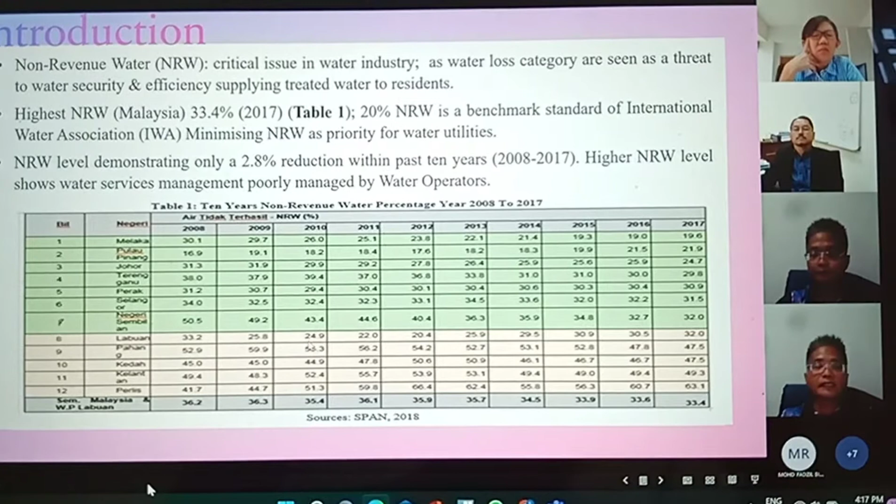Non-revenue water is a critical issue in the water industry, as water loss categories are seen as a threat to water security and efficiency in supplying treated water to residents. The highest non-revenue water in Malaysia was 33.4% based on data in 2017.

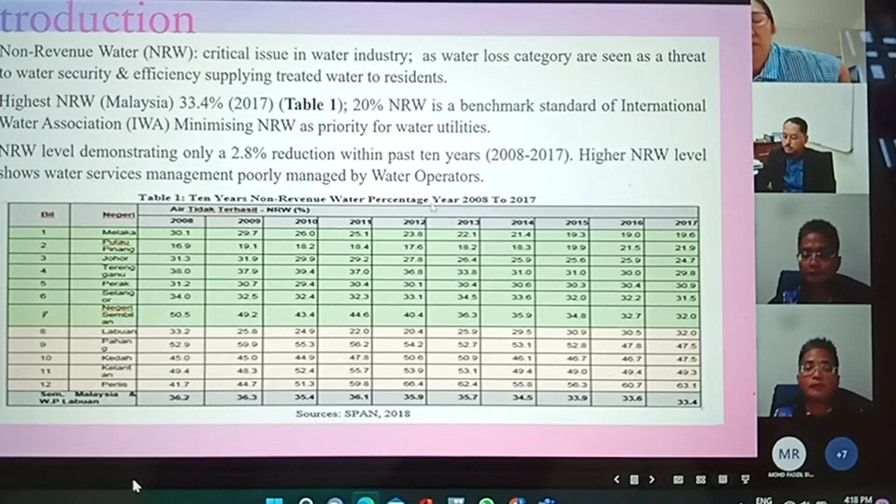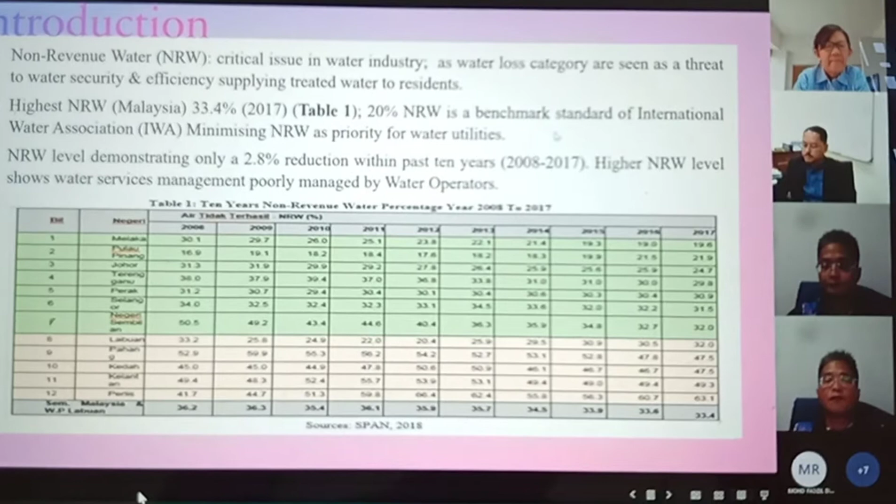In Table 1, about the 10 years non-revenue water percentage from 2008 to 2017 - by the way, only 20% non-revenue water is the benchmark standard of International Water Association. To minimize non-revenue water is a priority for water utilities.

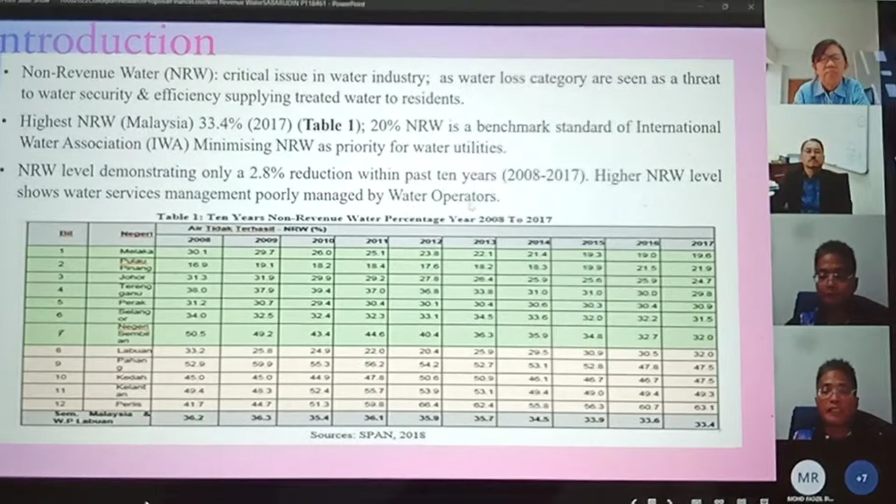The non-revenue water level demonstrated only a 2.8% reduction within the past 10 years, with the higher NRW level showing water service management poorly managed by water operators. This source is from the National Water Services Commission in Malaysia.

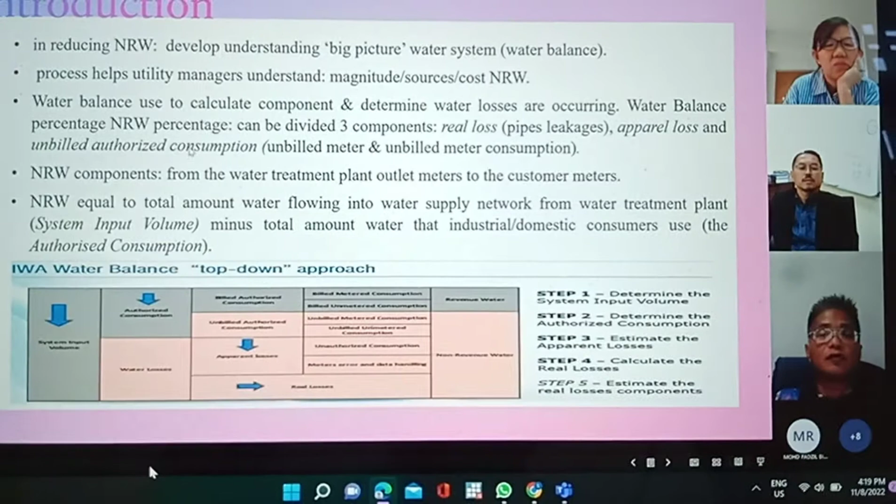In reducing NRW, developing understanding of the big picture water system is about the water balance. This process helps utility managers understand the magnitude, the sources, and the cost of NRW. Water balance is used to calculate components and determine water losses occurring, as well as the water balance percentage.

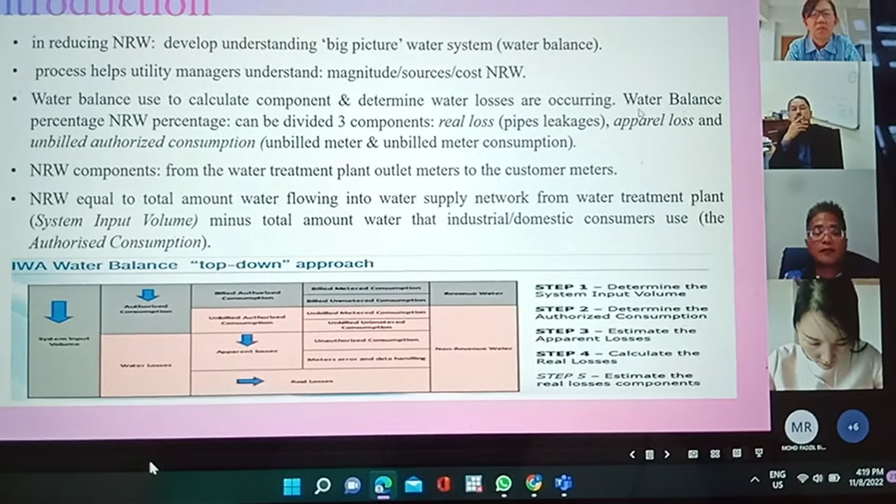Water balance percentage can be divided into 3 components: real losses because of pipe leakage, apparent losses from unauthorized consumption, and unbilled authorized consumption.

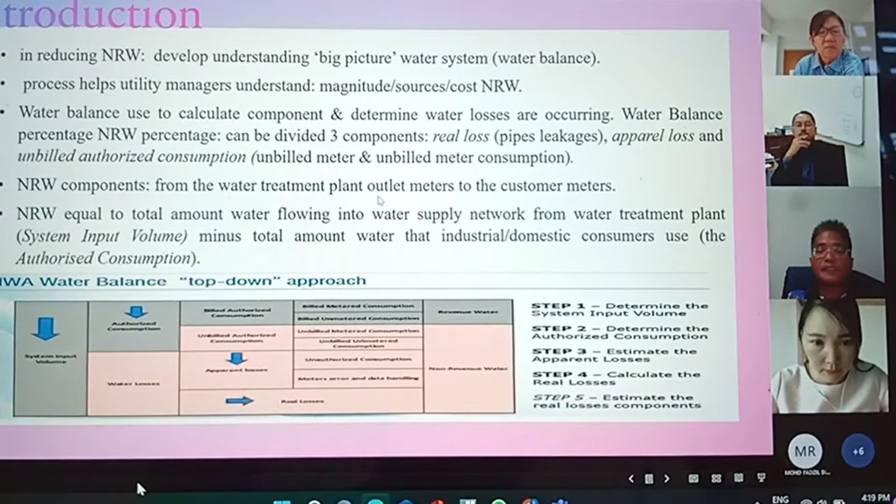NRW components come from the water treatment plants to customer meters. NRW equals the total amount of water flowing into the water supply network from water treatment plants. System input minus the total amount of water that industrial and domestic consumers use as authorized consumption. This is the approach known as the water balance top-down method.

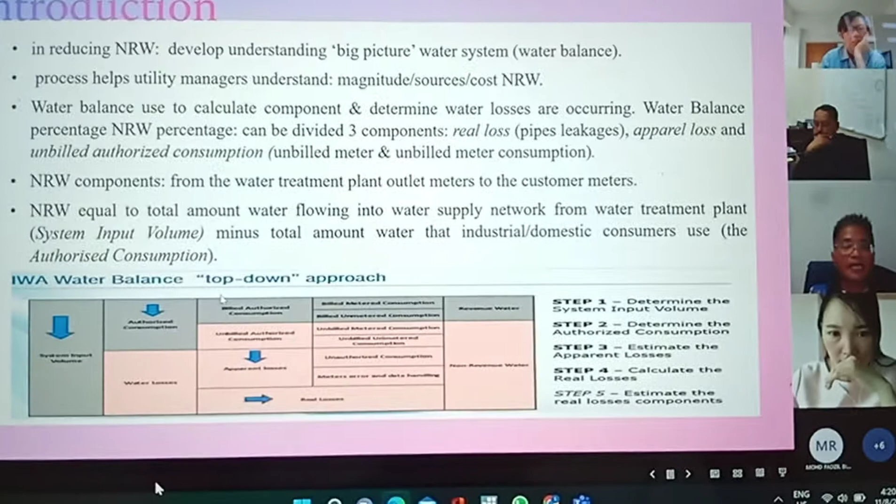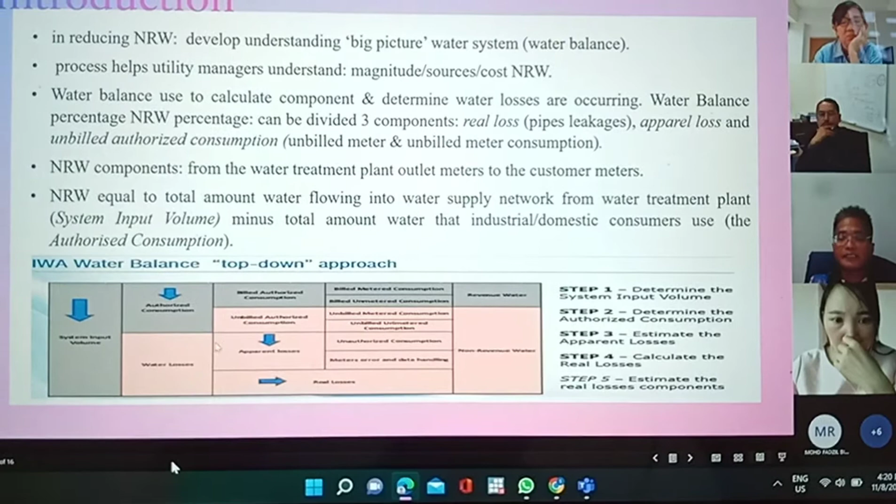Step 1 is to determine the system input first, then estimate the authorized consumption, then estimate the apparent losses and real losses. My area of study is about the real losses.

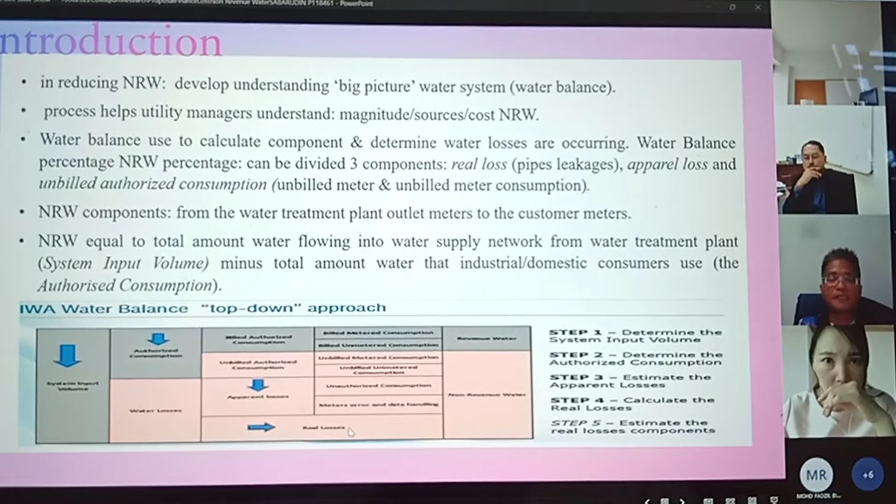I focus on non-revenue water because of the percentage of losses from real losses of water.

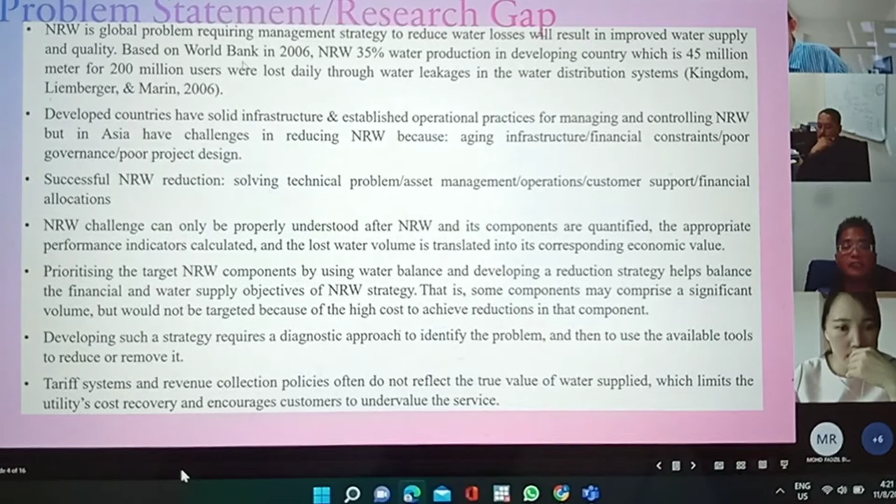My statement is that NRW is a global problem requiring management strategy to reduce water losses, which will result in improved water supply and quality. According to the World Bank in 2006, 35% of water NRW production in developing countries, which is 45 million cubic meters for 200 million users, were lost daily through water leakage in the water distribution system, as mentioned by Kingdom, Liemberger and Marin. Developed countries have solid infrastructure and service operational practices for managing and controlling NRW, but in Asia they are challenged in reducing NRW because of aging infrastructure.

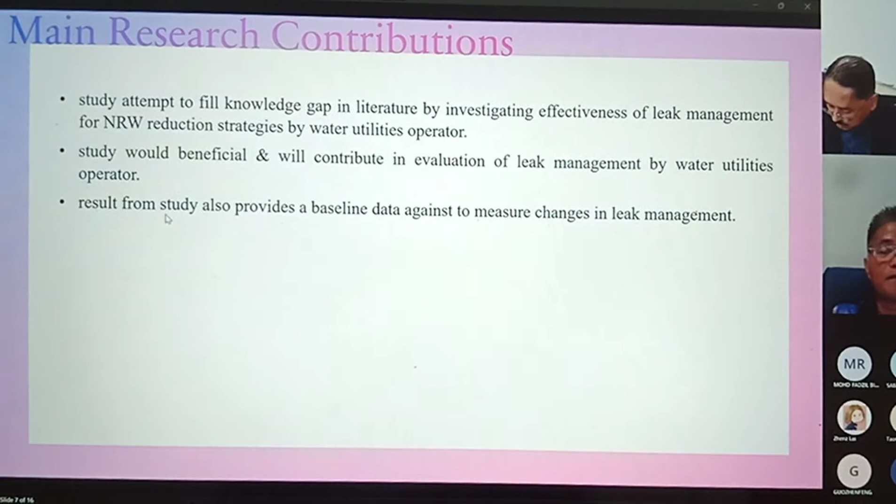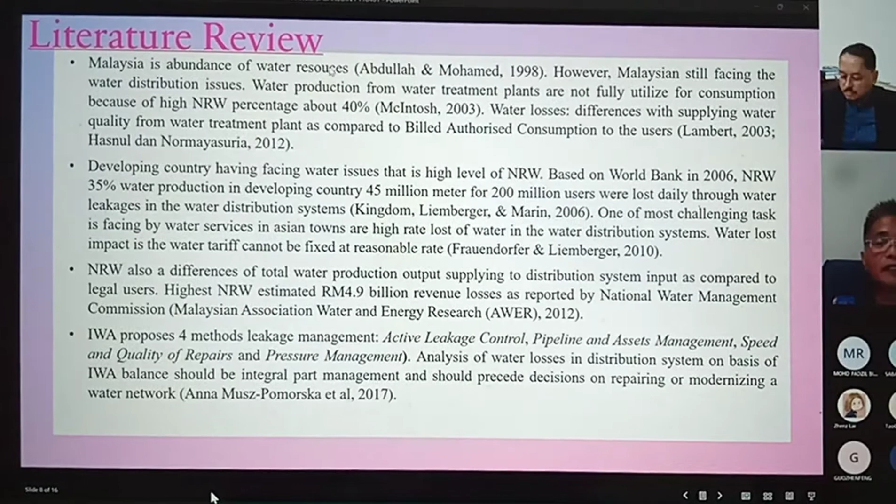In this literature review, Malaysia is abundant in water resources, as cited by Abdullah and Mohamed. However, Malaysia is still facing water distribution issues. Water production from water treatment plants is not fully utilized for consumption because of the high NRW percentage, about 40%.

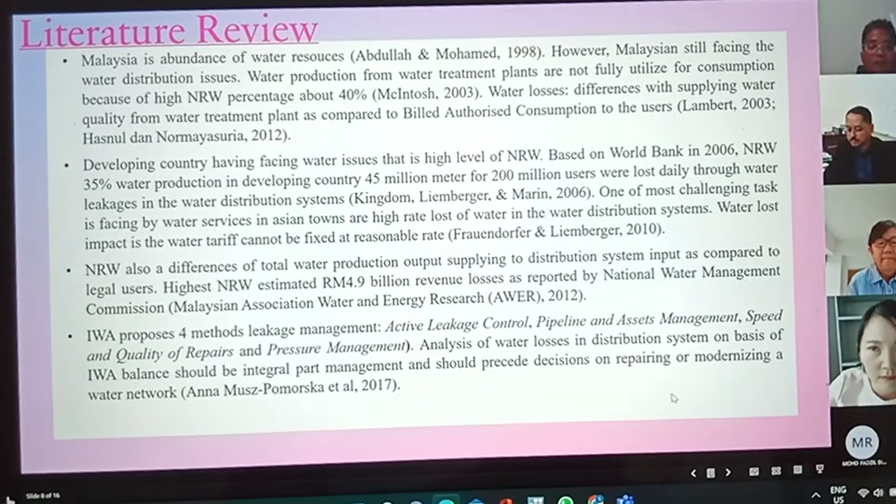Water loss is the difference between the supplied water quality from the water treatment plant as compared to the billed authorized consumption by users. Developing countries are also facing water issues of high NRW levels. Based on the World Bank in 2006, 35% NRW water production in developing countries, 45 million cubic meters for 200 million users, were lost due to water leakage in the water distribution system, as reported by Kingdom, Liemberger and Marin.

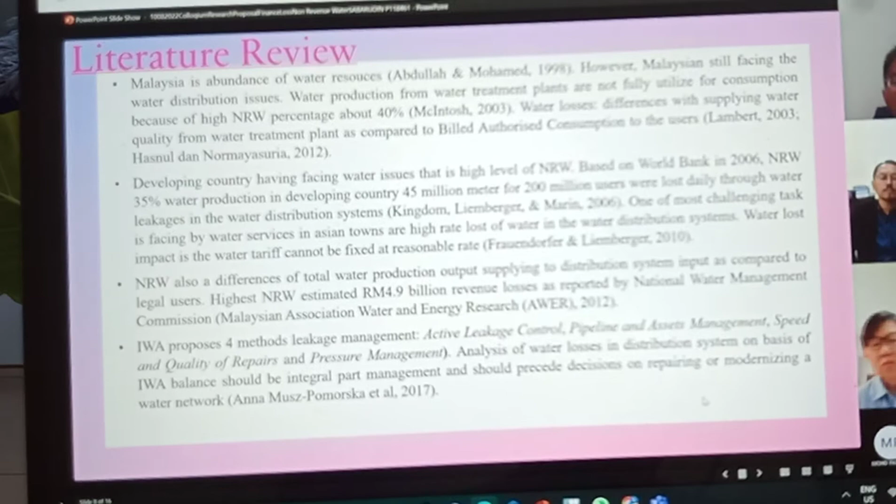One of the most challenging tasks facing water services is accounting for a high rate of water loss in the distribution system. Water loss impact is the water tariff that cannot be fixed at a reasonable rate. NRW also represents the difference between total water production output supplied to the system input as compared to legal users.

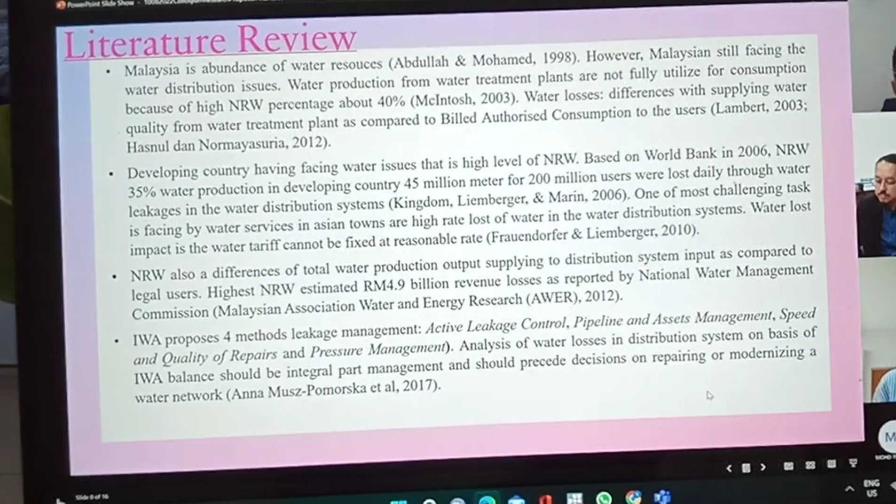The highest NRW resulted in 4.9 billion ringgit of revenue losses, as reported by the National Water Management Commission, cited by the Malaysian Association of Water and Energy Research in 2012.

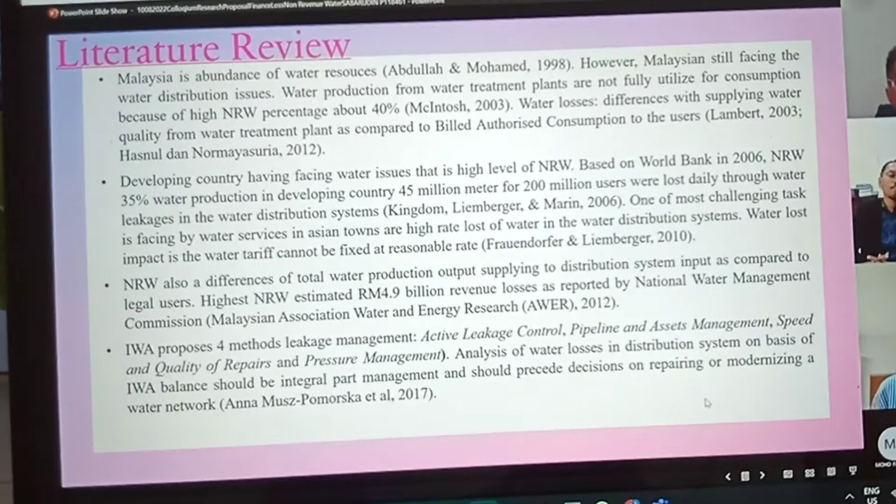IWA proposes four methods of leakage management: active leakage control, pipeline and asset management, speed and quality of repairs, and pressure management.

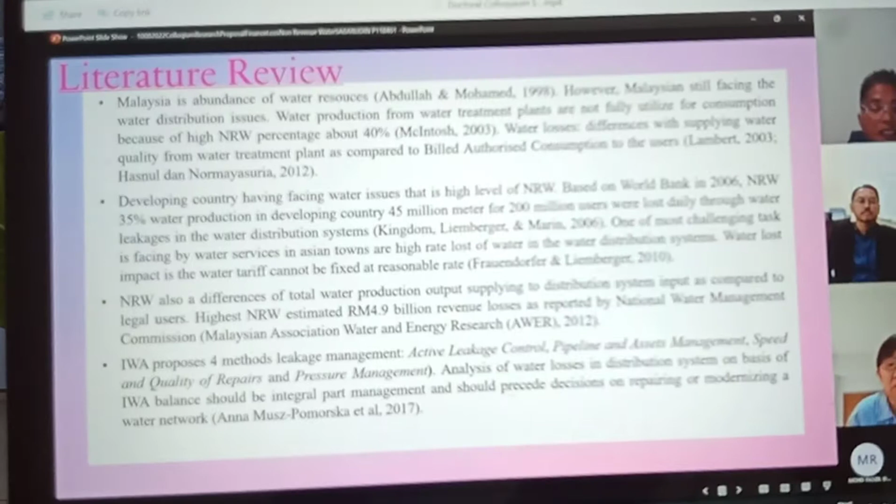Analysis of water losses in the distribution system on the basis of the IWA balance should be an integral part of management and should precede decisions on repairing or modernizing the water network. This is my summary of the review on reducing non-revenue water.

My hypothesis development: Hypothesis 1, water losses do not influence non-revenue water in the water distribution network. Hypothesis 2, prevention, leakage and control water pressure projects do not mediate the effect for reducing NRW in the water distribution network. Hypothesis 3, leak detection sensors do not moderate the effect for reducing NRW in the water distribution network.

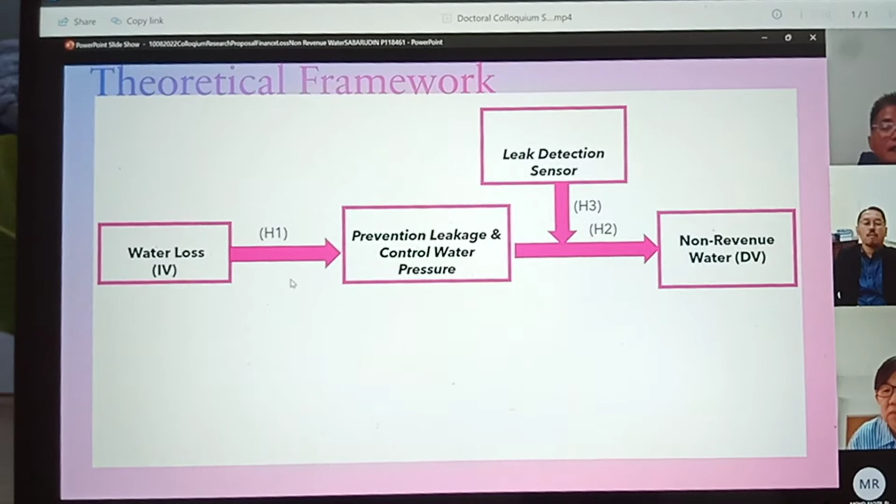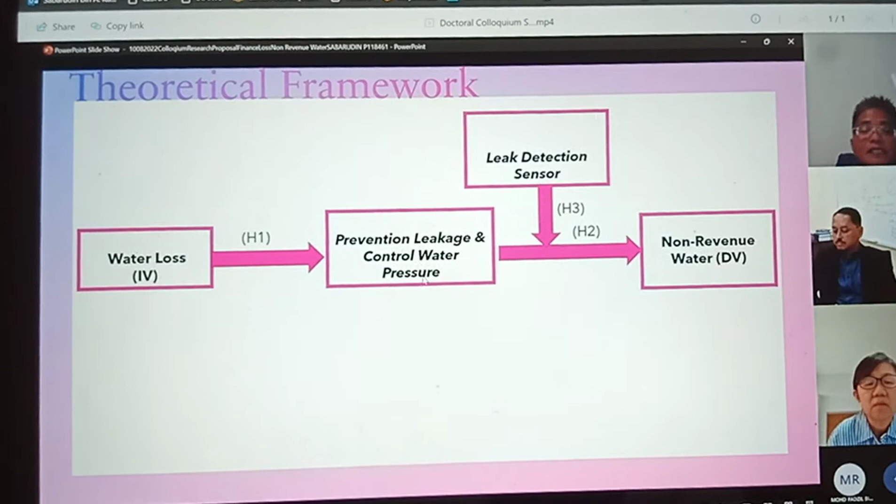My proposed theoretical framework: water losses is the independent variable, prevention, leakage and control water pressure is the mediating variable, non-revenue water is the dependent variable, and leakage sensors is the moderating variable.

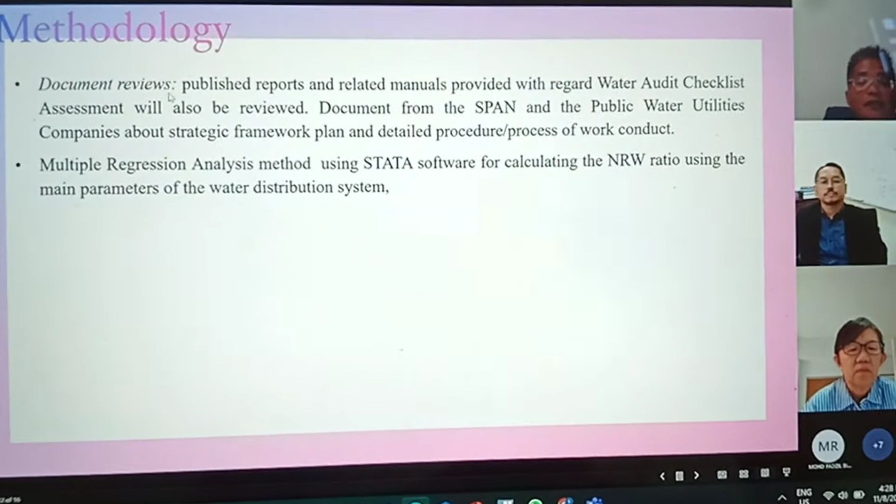My methodology is document reviews, which includes published reports and related manuals provided with regard Water Audit Checklist Assessment. This will also review documents from SPAN and the Public Water Utilities Companies about strategy framework, plan, and detailed process of work conducted, using multiple regression analysis method.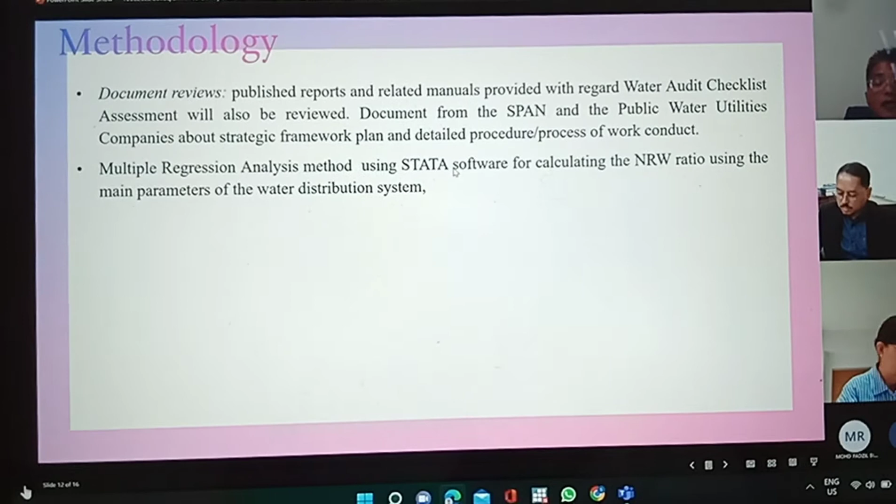Using software procedures for calculating the NRW ratio based on the main parameters of the water system, using secondary data.

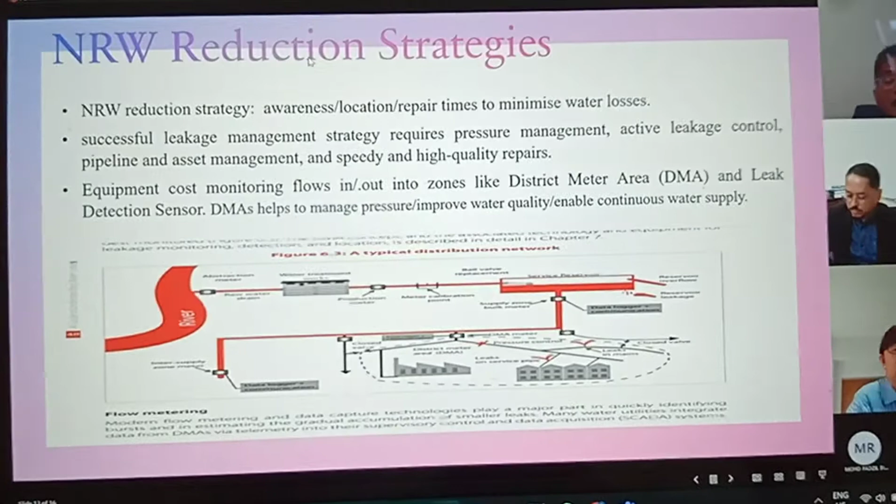The national NRW reducing strategy involves creating awareness of leak location and repair time to minimize water losses. The successful leakage management strategy requires pressure management, active leakage control, pipeline and asset management, and speedy and high quality repairs.

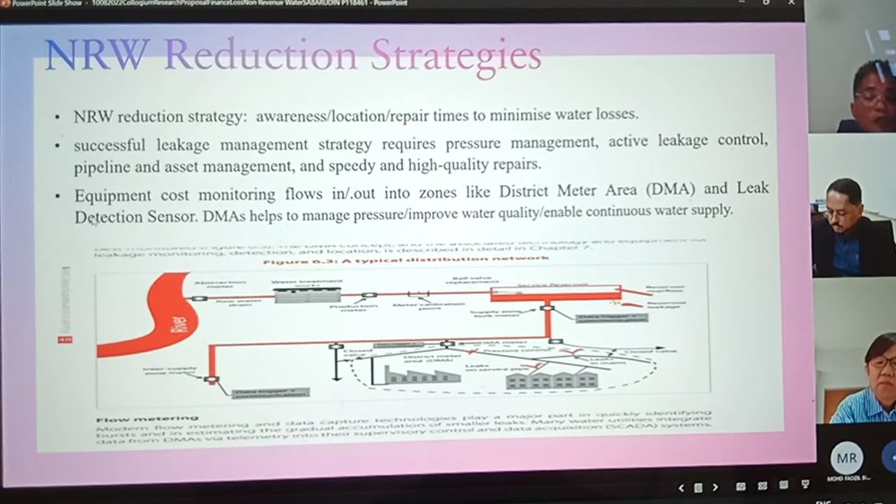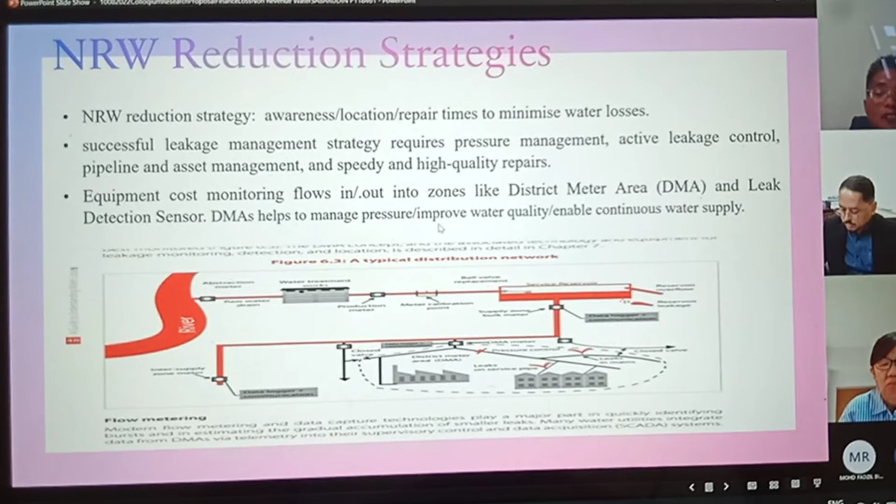Equipment cost monitoring of flows in and out of zones, like a district meter area, and leak detection sensors. DMA also has to manage pressure, improve water quality, and enable continuous water supply. This is the model of DMA.

My limitation is the availability of data, relying on water pressure and SPAN annual reports. This is all, I think, for my presentation. For now, I'll hand back to Professor and Doctor.

Thank you very much, Sabarudin. Dr. Farouk, would you like to start your comment? Okay, thanks Prof. Sabarudin. Assalamualaikum. Okay, yeah, but there are a few questions from me that need your clarification.

When I read the title of your research, Leak Management of Public Utilities for Non-Revenue Water Reduction Strategy, I'm not clear about the leak management. What do you mean by leak management and how does it relate to the non-revenue water reduction strategy? Actually, yes Doctor, I'm sorry, because I just changed my topic to public water operators' water losses, but focusing on strategies for reducing non-revenue water, focused on Malaysia.

Okay, so this is a new title, it's not like what is in my hand at the moment. Okay. At the end of the day, this new title is also a problem. Yes, Doctor, this new title is also very broad. My topic now.

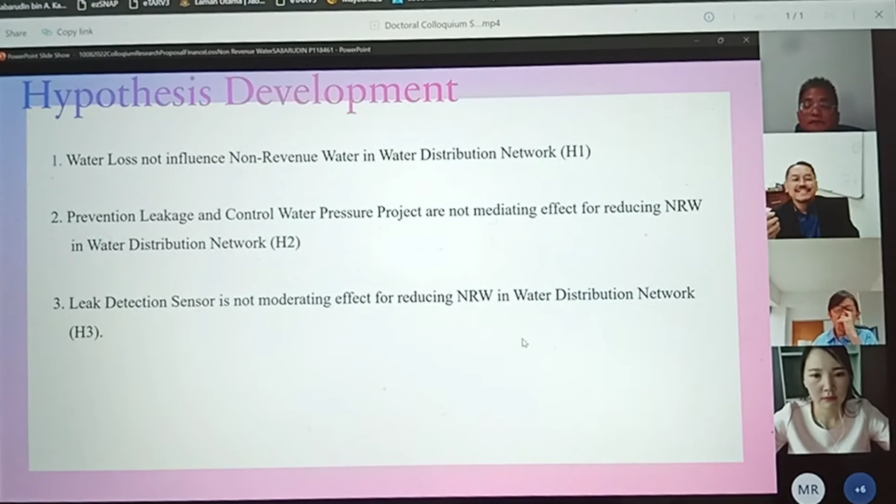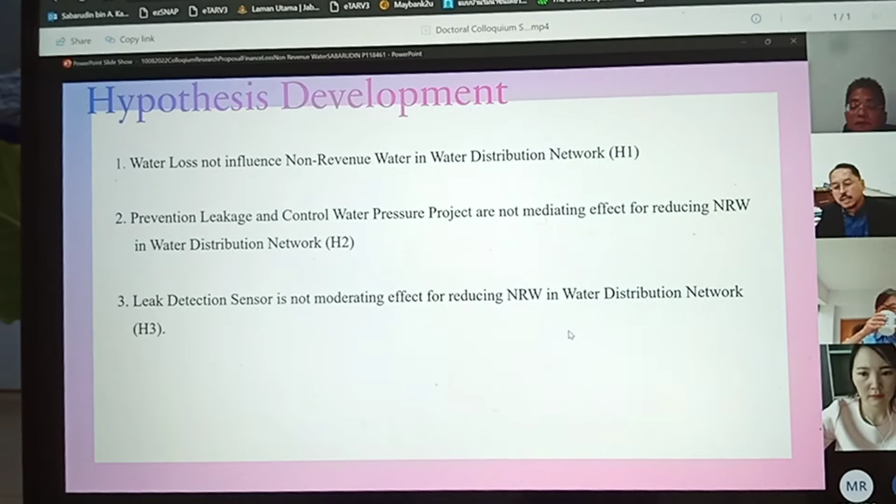This hypothesis, for me, seems like you're trying to prove something, like you're trying to prove the current strategy is not effective and not efficient. That is my impression. Or, at the end of the day, you expect to find some strategies to overcome the problem of this non-revenue water. Which one? It's not clear to me, Sabarudin.

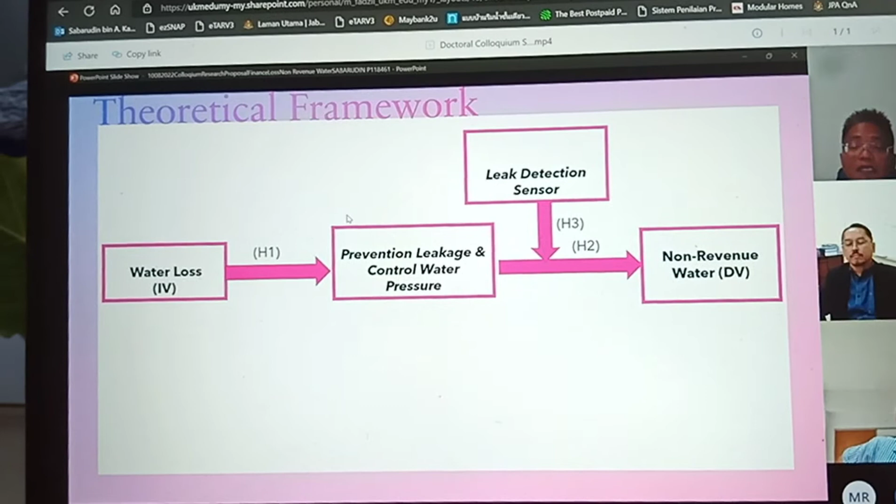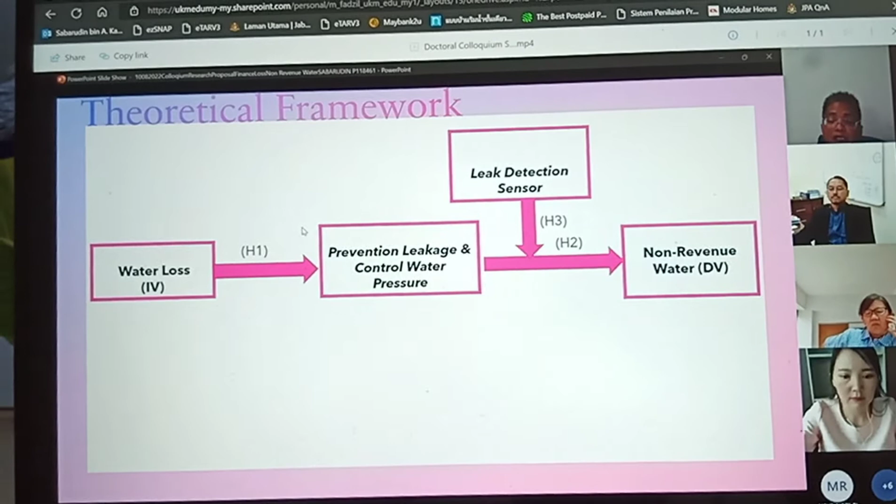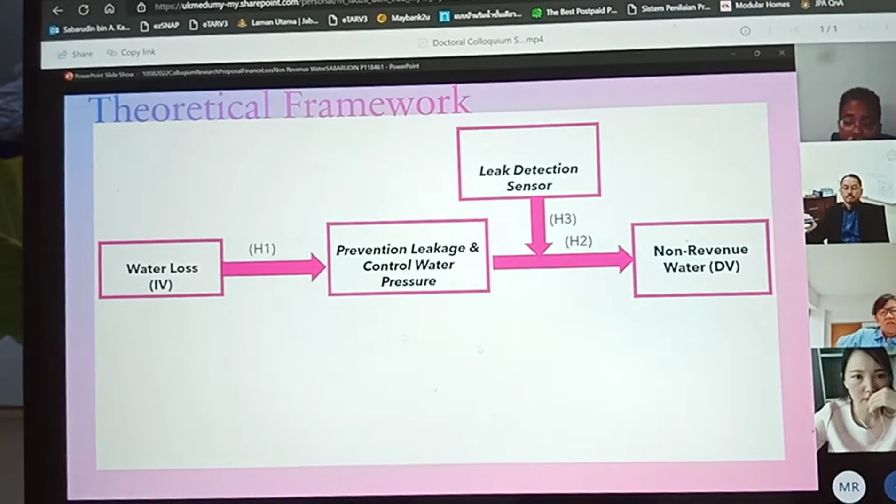Okay Doctor, based on my theoretical framework, I want to make clear whether water losses as an IV have a correlation with the non-revenue water. I just focus on the multiple regression analysis having a correlation effect. So, I think this is the first time there are studies about multiple regression analysis done this way, and I think I'm the first to study this in Malaysia using this procedure.

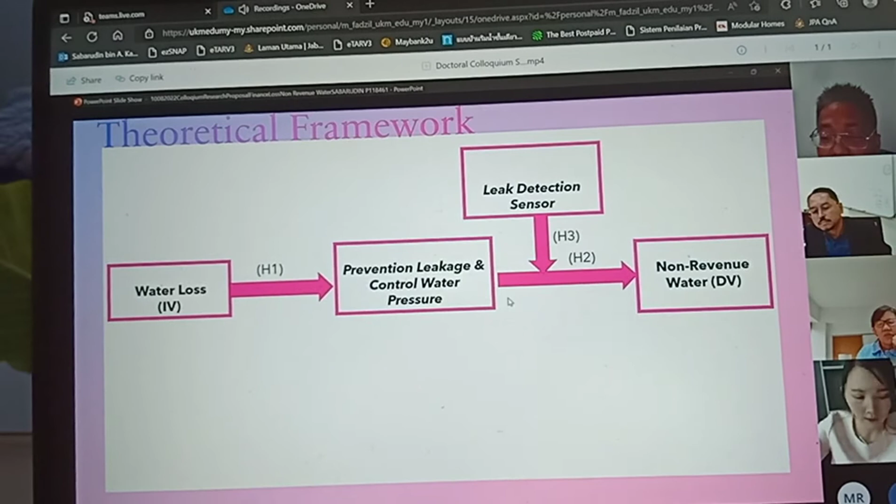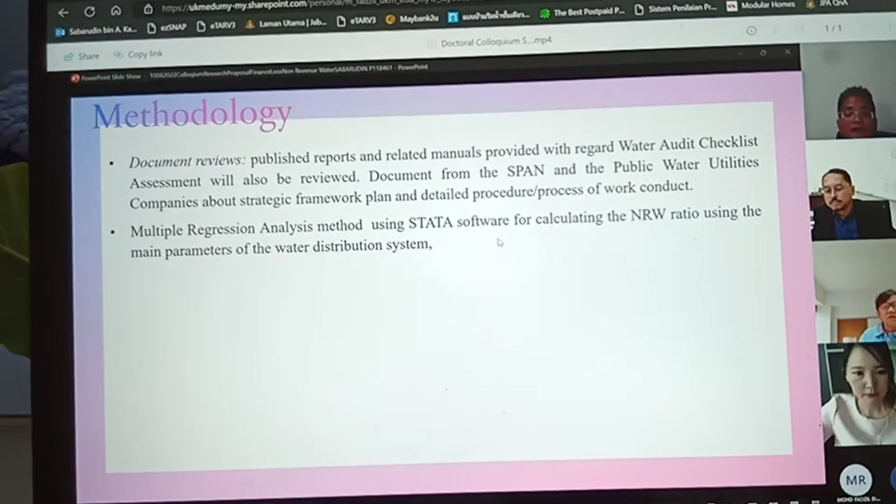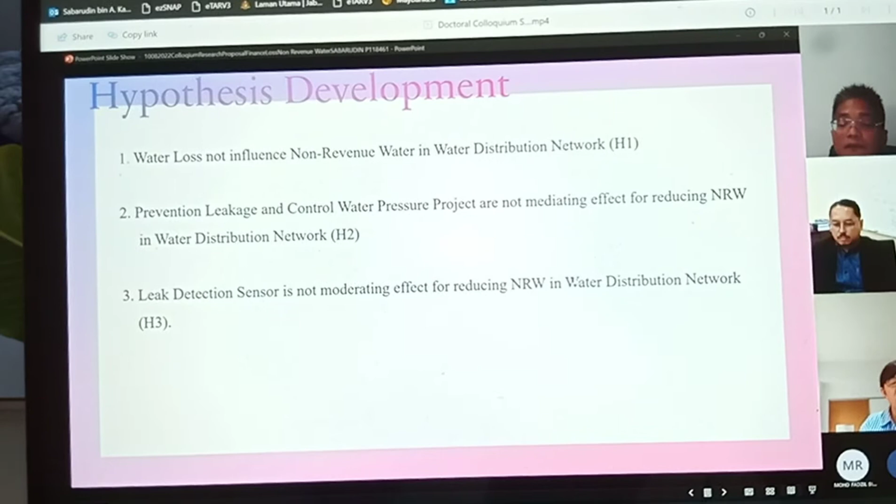I agree with what Dr. Fairuz just pointed out. If you go back to your diagram, Sabarudin, it is still not clear. The hypotheses are very poorly stated, and if you look at the way you state your hypothesis, and also look at this theoretical framework, I don't think this is a theoretical framework. The way you state your hypothesis, I don't see any scholarly voice here. Put it this way, your research is lacking scholarly voice.

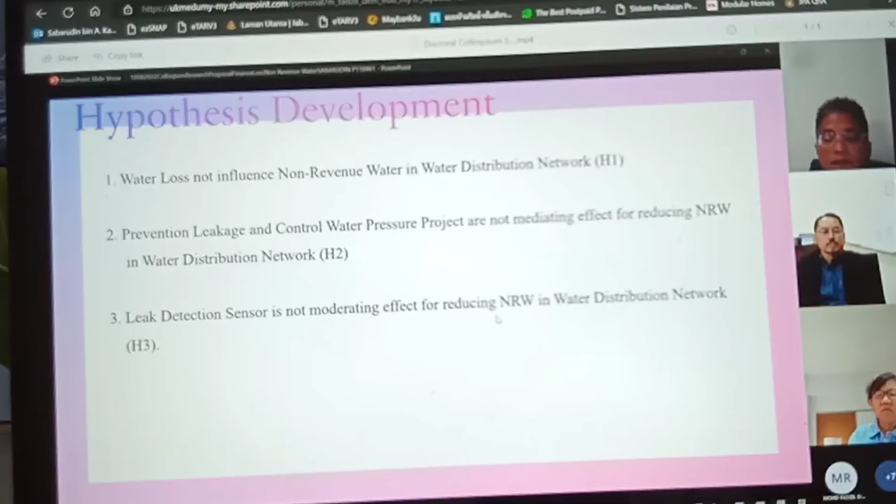So we understand you are a DBA student in your first semester, it might take longer for you to actually understand what academic work is. But based on your existing research, I don't see much scholarly element in it.

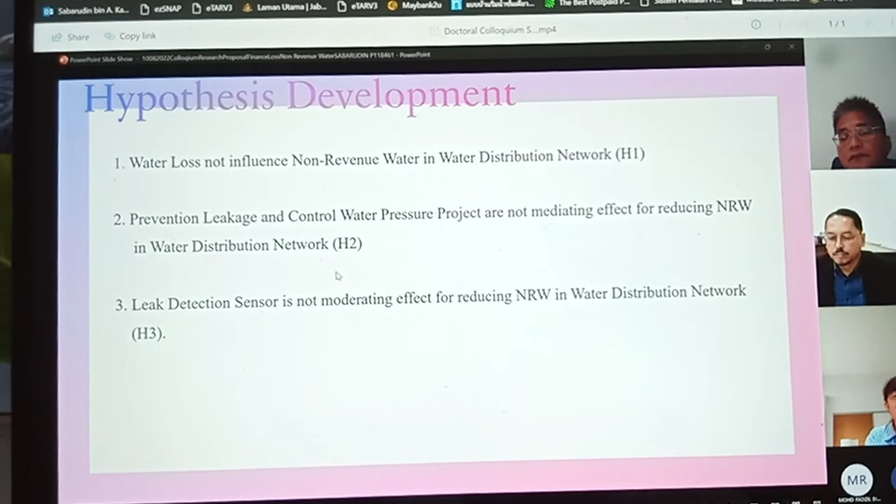Maybe this is what you plan, what you have interest in, what you want to do. But it looks as though this is more of an applied research with some application of literature, because applied research also requires a literature review. But the way you state your hypothesis, the way you formulate that framework, it looks to me more like applied research rather than academic research.

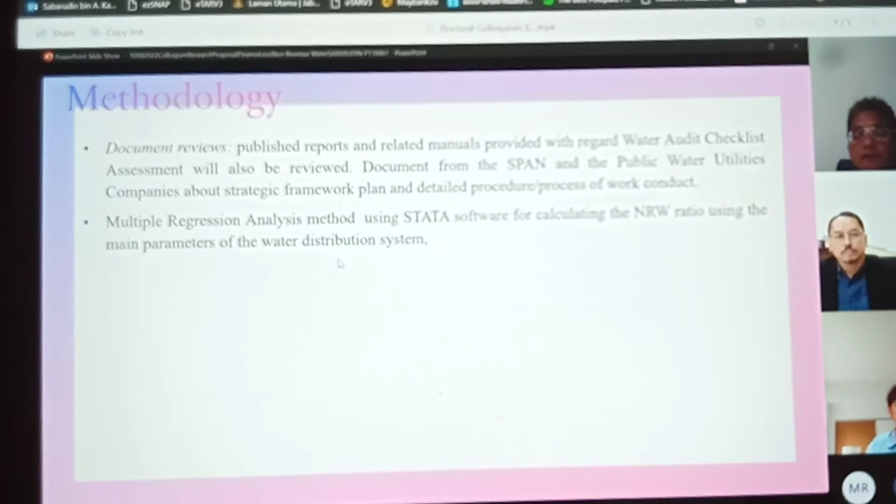Can you go to the next slide? And also the methodology that you want to use. Next slide, Sabarudin. Document reviews. This is not acceptable. Your document review comes from published reports and related manuals provided by this water audit checklist assessment. All of these are not acceptable references for academic research.

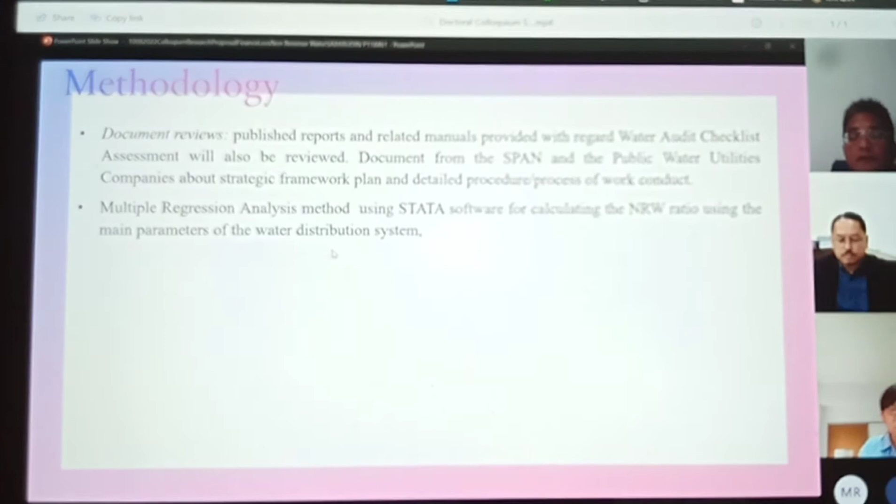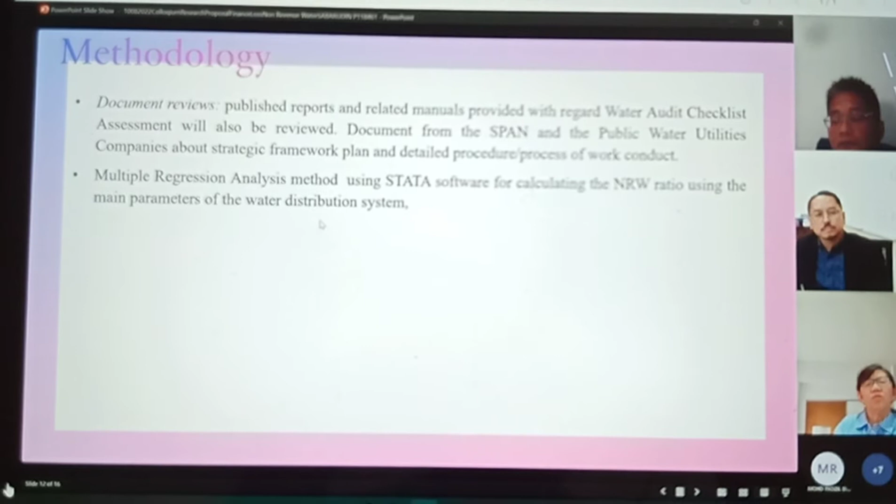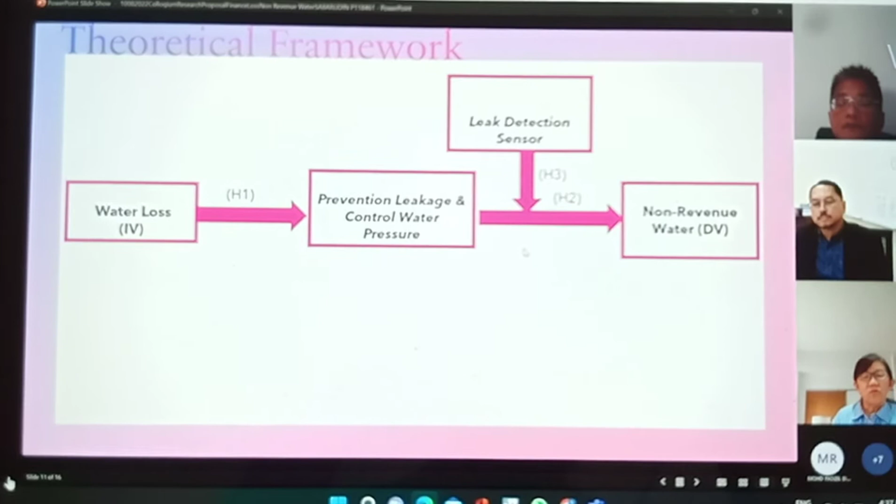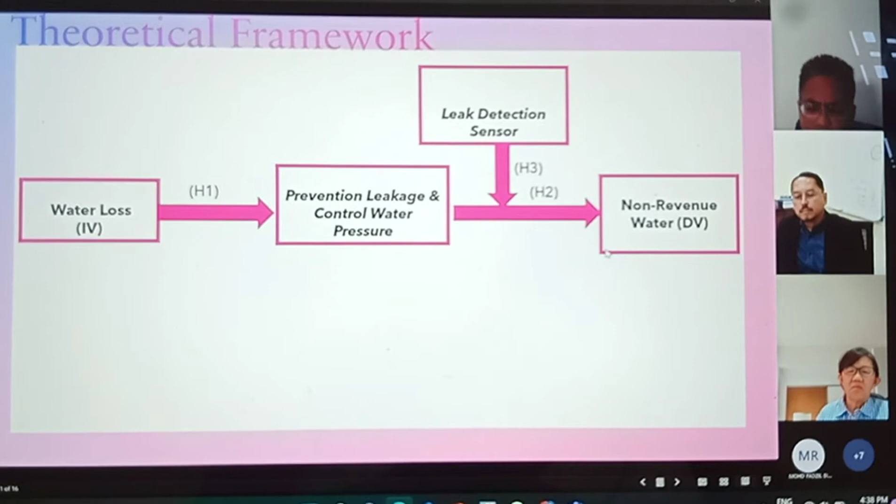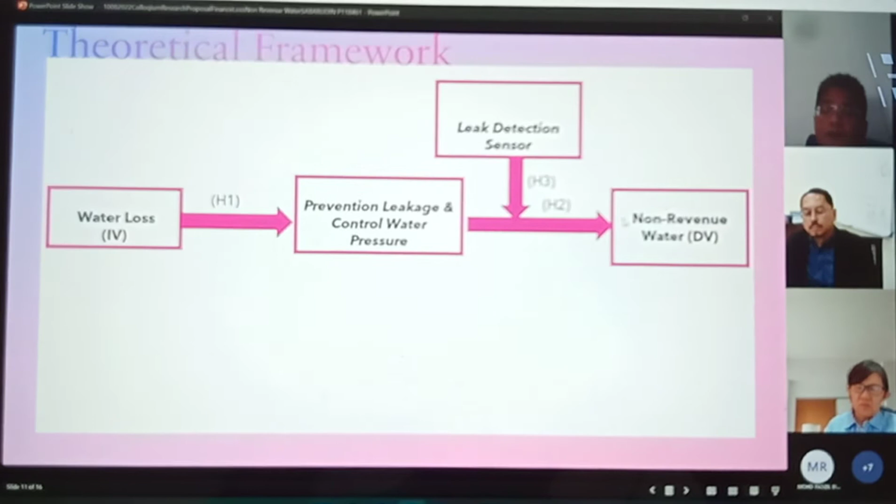Because I want to clarify about the collection by the public utilities. The water leaking means that money also cannot be collected by the public utilities, so NRW is very important. So 50% of the water loss is because of non-collection and because of water losses also.

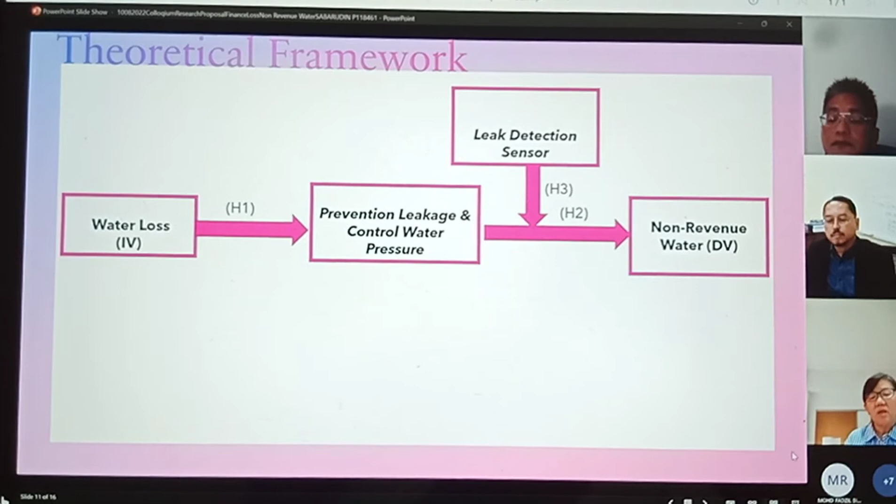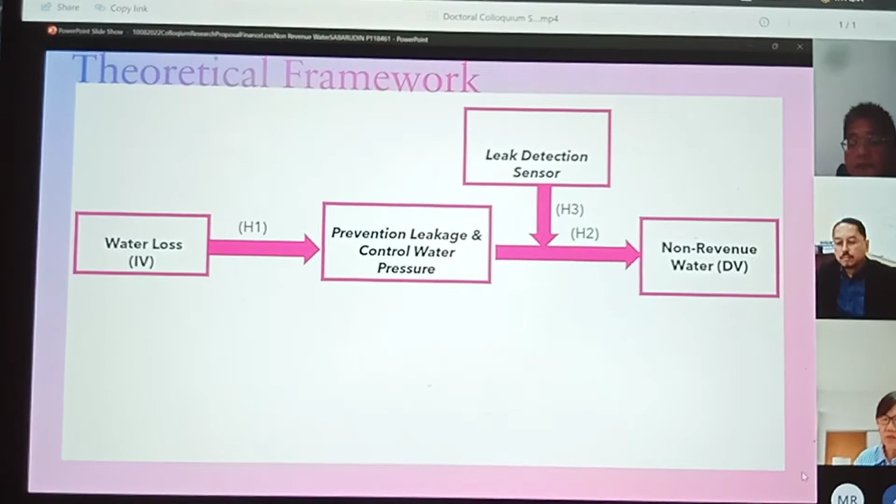This is okay to be used because for academic research, academic research needs to be backed up by academic work. Meaning to say, whatever you want to investigate, there must be an academic backing for the work you plan to do. But in addition to the academic backing, if you can bring in some practical evidence, for example this one, I see this as practical evidence to highlight the importance of your study. This one you have, Sabarudin — you have the anecdotal evidence to support the importance of your study.

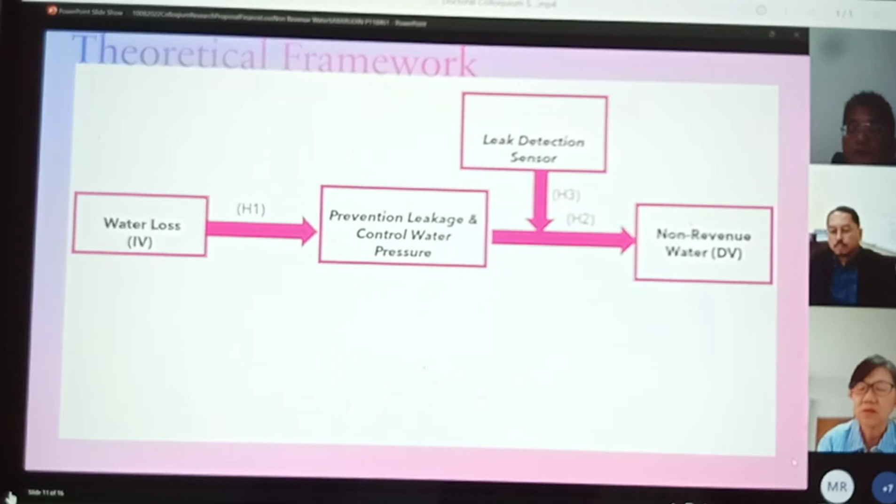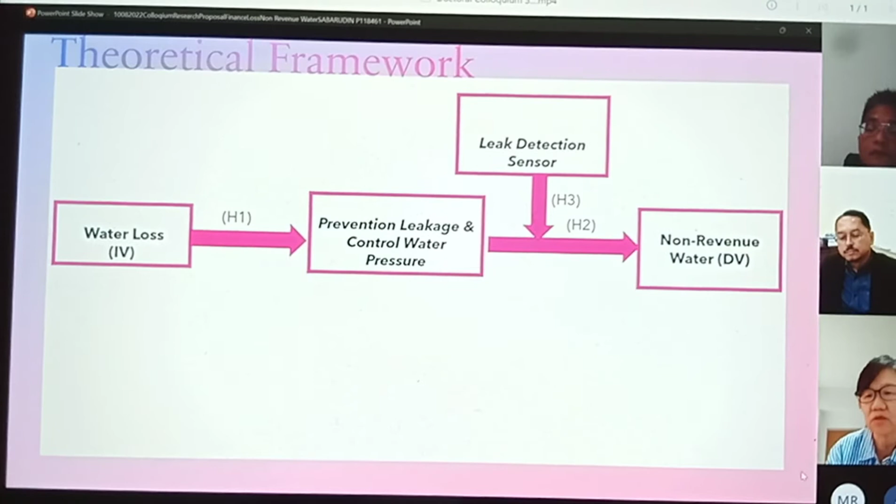So what is lacking here is the empirical backing, because your thesis will be an academic thesis. You are not working on practical research, you are not working on industry-based research, you are working on academic research. So you have to understand that. For academic research, having practical evidence to back up the importance of pursuing that research is actually very good — many students are not able to find practical importance to support their topic, so in your case, you have that data to support you.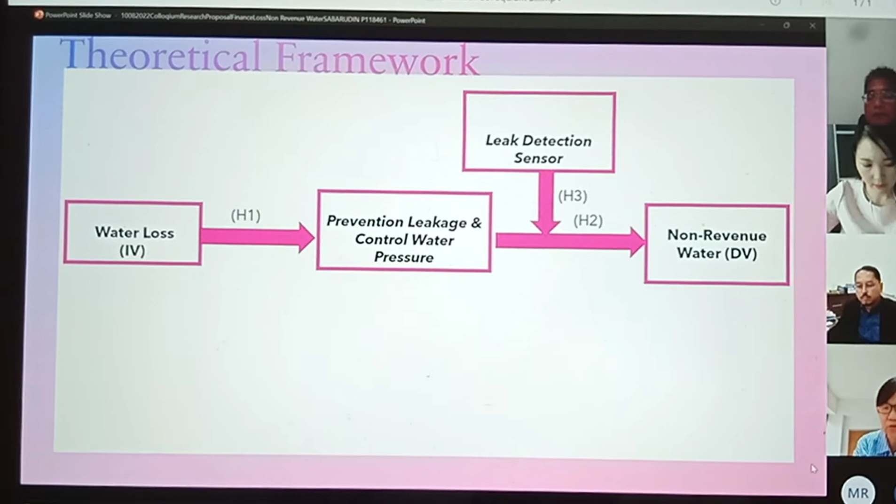But what is lacking here in your proposal, in your proposed research, is the academic side. So maybe you need to work on it, right? Because your methodology cannot be a document review.

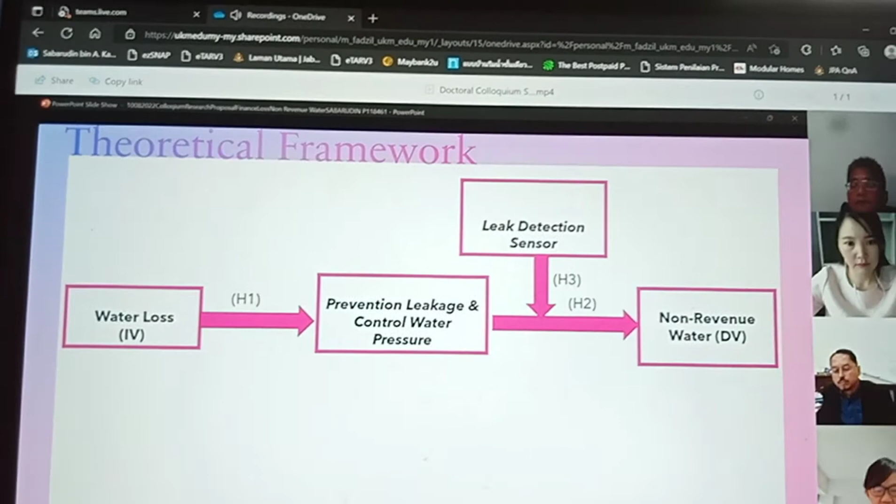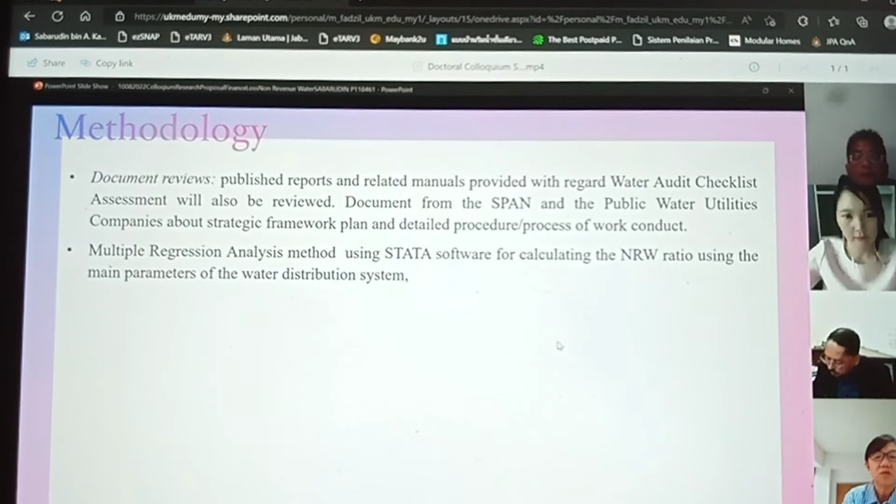And document review, it comes from all these. If you turn to the next slide, look at the document review. Those are not the next slide. Next slide. Those are not academic papers — they cannot be your document review.

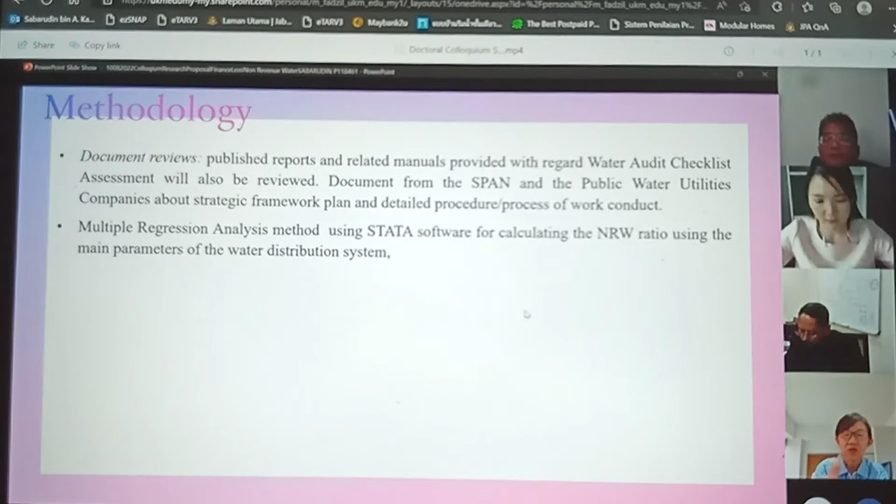So I understand your point. You have a very valid and good reason for the importance of your topic, but you need to think further about how to put it in the academic context. How to do that? Meaning you need to search for research that studies water loss. So let's look at your references, see what kind of references you are referring to.

Let's look at your references. Can you display it? It's too small, I cannot see. Can you put it in the presentation slide?

Oh, Sabarudin, yes — I'm getting my proposal. Is it possible I could transfer to management? Because I think management is very suitable for my topic about water leakage.

Yes, you can, but now you have already taken all the courses in finance, is that correct, Sabarudin? Yeah, only one subject. Could I proceed to management, or how long would it take?

Okay, why don't you talk to the head of the research program, Dr. Azmi Arifin? Why don't you write to him about your intention and ask advice from him, saying that you want to transfer to management. Since you are a DBA student, I think you will have to take the courses again starting from the first semester — start everything all over.